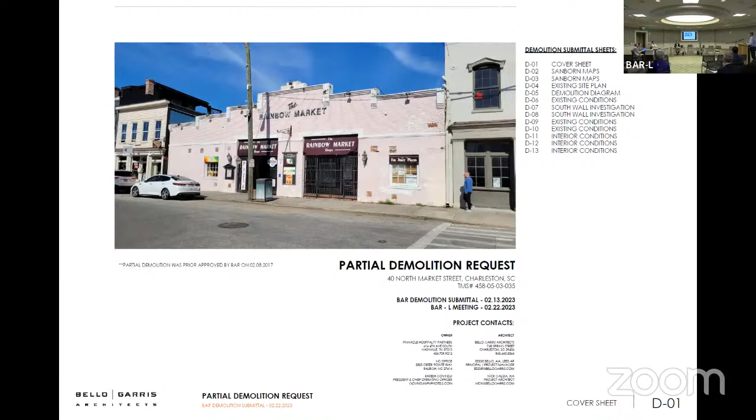This is a little bit unusual in that back in 2017, this project got approval for partial demolition, keeping the south facade and part of the north, sort of an old remnant of a wall. We're asking to keep the south facade again and tear down what's behind it. That paneled wall, in our opinion, is not contributory. So what I'm saying is a lot of this has already been approved, but the demolition approval has expired and we're reapplying for that. Next slide, please.

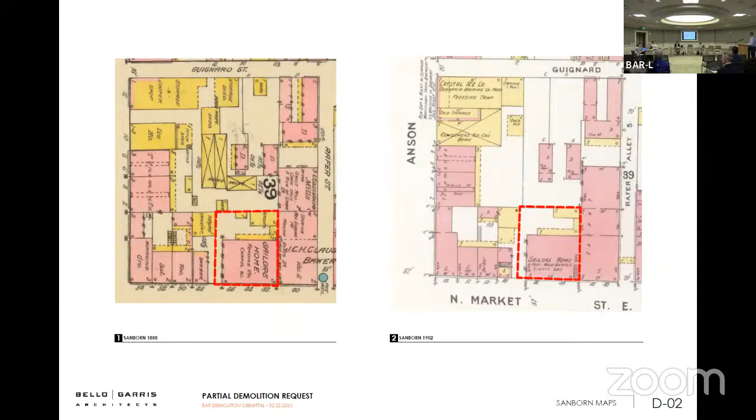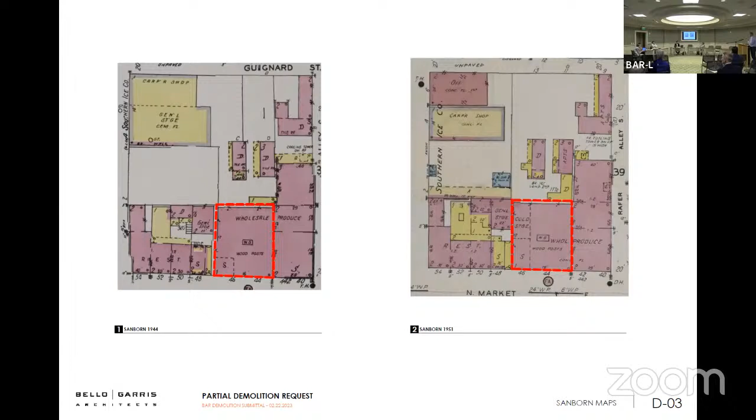So there was a historic sailor's home, tenement house, boarding house that has long since gone on the site in the early 1800s. Next slide. Both of these show the warehouse wholesale building that we're requesting demolition of. Next slide. So you can see here what's in red. This is an existing building. We're not doing anything to that. We're keeping this, removing what's back behind it.

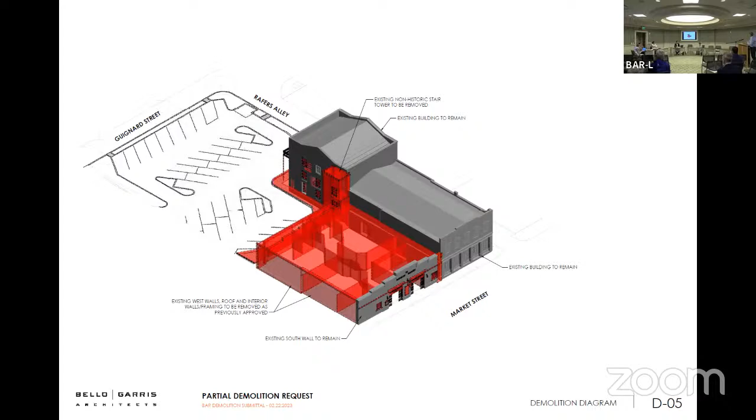Graphics showing there. So we had a site visit yesterday. Nobody showed up except for me and Lawrence and Nick and Aaron. We can show you some photographs. Next slide. Not a lot of historic fabric. This facade has been altered over the years. In the prior application back in 2016, another architect did some exploratory work to see what was behind that facade. It's been altered a lot. I don't think there are the original openings. It's made of block, some historic brick, some new brick.

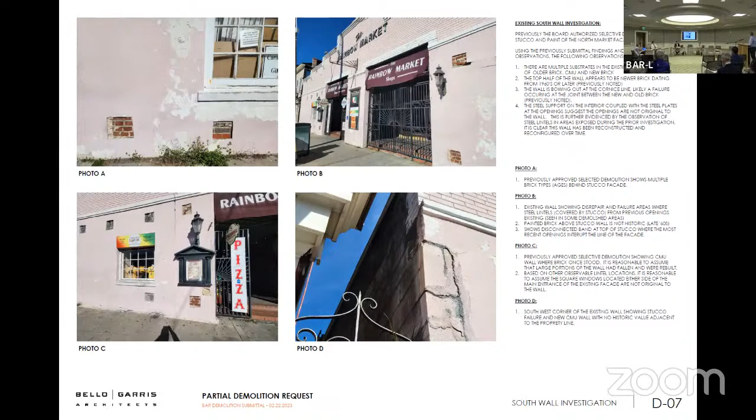Part of the building, you can see in that bottom right photo, is concrete block, the whole western wall. Again, we're keeping that south facade, and we have another project coming to talk about that, but even the part we're keeping is not particularly historic. The form is, but the actual fabric is not very significant. Next slide. Just showing, if you haven't been out there, I think a lot of people have walked through there around the market.

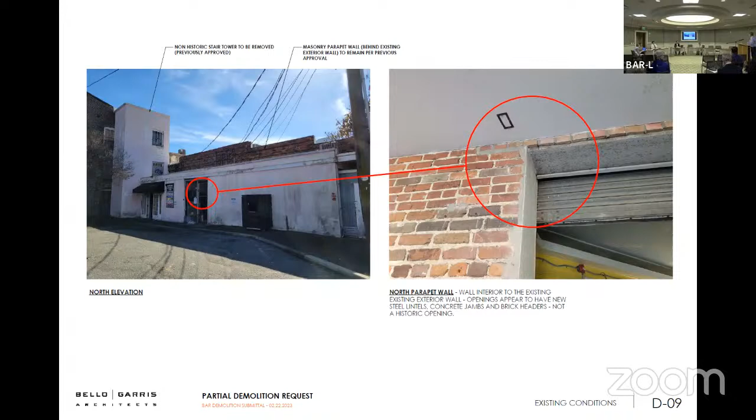This wall was asked to be kept because the architect was going to have a courtyard and this was going to be exposed. If you go to the side, much of this wall's already gone. There's a big opening here and another one here. So there's really just a little wall left. So we're asking for all that to go. Obviously, all this back here is not historic and doesn't contribute. There are not. Next, got one or two. So what's already been approved, other than that little back wall, and I'll just take questions.

Thank you, Mr. Bello. I'm going to borrow a cue from Mr. Metters, who's not with us here this evening. Is there any member of the public who wishes to speak against the partial demolition, I should say? Any member of the public wishing to speak against? Okay, thanks. City staff comments or recommendations?

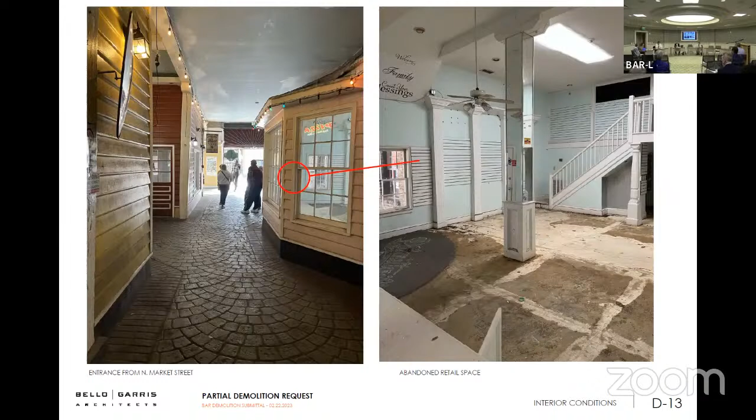So 2 comments. Number 1, exploratory demo indicates that the south-facing wall is constructed of differing materials of varying ages. Additionally, the presence of steel plates and lintels indicates that the existing openings may not be original to this building. And 2, similarly, the openings on the north wall do not appear to be historic based on the presence of steel lintels and concrete jambs. The masonry parapet wall, which may be the most interesting element of the facade, sits behind and is mostly hidden by an exterior wall added later. The stair tower is not original.

We're recommending final approval for partial demolition of the structure at 44 to 46 North Market Street, retaining the south facade. I don't think there'll be any time. No. We'll move to board discussion on this agenda item, if any, or if not, a motion.

Motion to approve final approval of partial demolition. There's a motion for final approval of the partial demolition pertaining to the south facade. Is there a second? Second from Ms. Sobchak. Ms. Sobchak, how do you vote? Yeah. Ms. Brown? Yeah. And myself, in favor. Thank you, Mr. Bello. Thank you.

That's good because I have half my class here. Oh, you know, it's really embarrassing. You should have told us that. You should have told us that. Y'all need to stick around for something good. Good stuff's coming now. All right, thank you. All right, very good. See y'all.

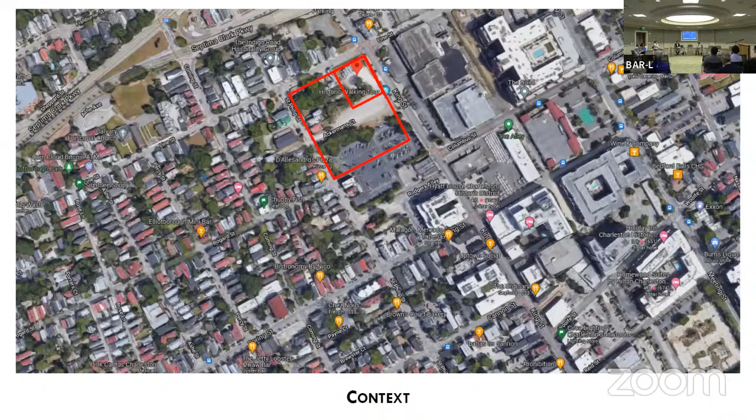Moving right along, agenda item number 3, 649 King Street. This one is Courier Square Phase 2, Building 2. It's in the Cannonborough and Elliottboro neighborhood, at Districts 4 and 6, and in the Old and Historic District. The request for preliminary approval for a 15-unit apartment building with ground floor retail. This is Courier Square 2, and the smaller outline is where Building 2 will be. What it looks like today.

All right, we're ready for the applicant. And for anyone who wasn't here earlier, that microphone is not really working this evening. These are. So if you just speak and enunciate clearly and everyone out there can hear you, you'll be fine.

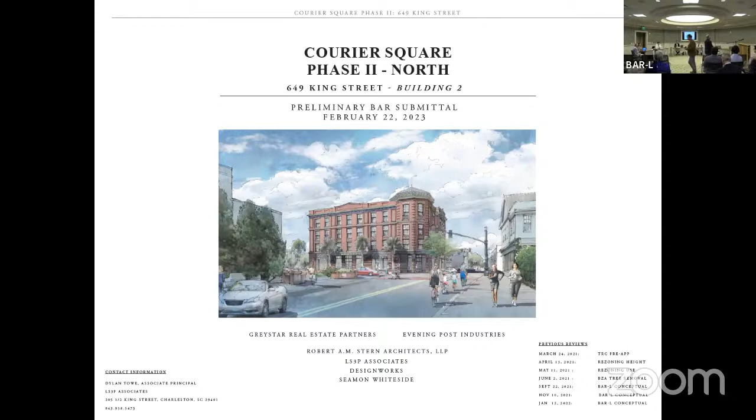I'll be very brief. Ben Lee's out with Greystar. We've gotten to know each other. We've been at this project for quite some time. Tonight's really about further iteration of the building, refinement a whole lot. We think a whole next level of detail since the last presentation. So we're excited. Thanks for your patience as we take our time to really get this building and the rest of this community right. So I think Scott's going to say a few things. Turn it over to Gary. Or Gary first. Yeah, either one. I think you're right. So, Lawrence, go forward a slide, if you don't mind.

Yeah, right there. So, what we're doing from a site development and landscape point of view for this project, we're going to come to you one time for all of that work, when building 1, the large building, comes to you. So we certainly are here to answer any questions about what's happening with the site if you want, but it's really not a part of this application. It'll be submitted for one approval. So now it's you. Gary? That's all I have. Gary Brewer.

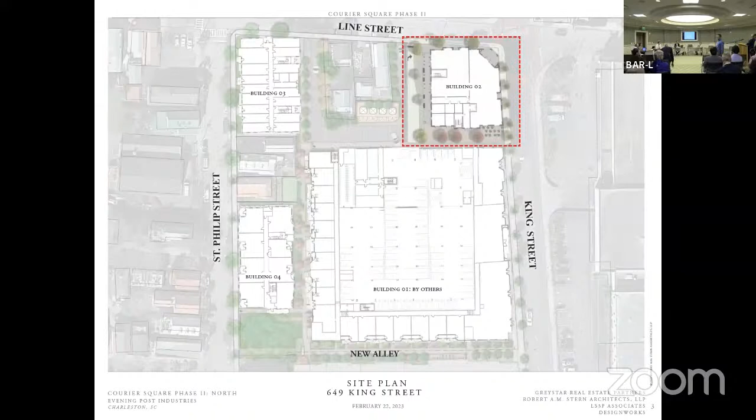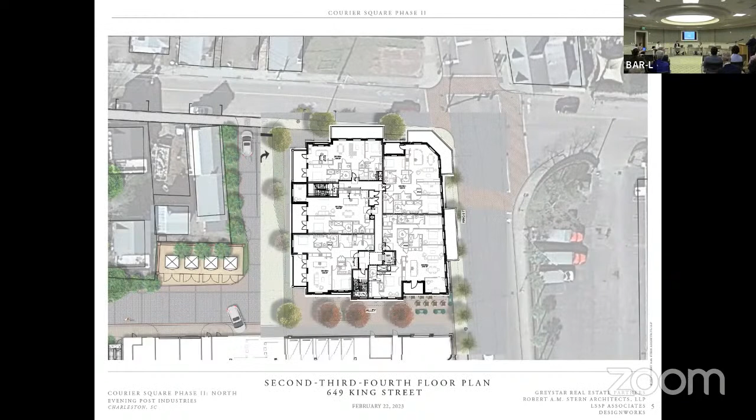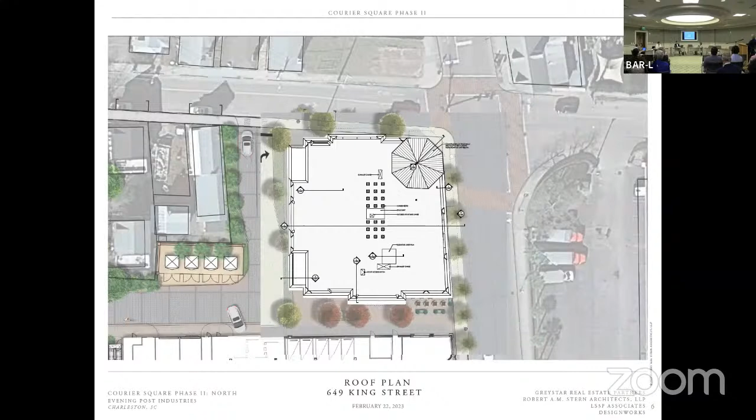So the site, as you know, is on the corner of Line and King Street with a proposed alley to the south and a motor court to the west and a corner entry on the corner. And there are 5 units per floor. This is the roof of the tower and the mechanical set in the center with high parapets to conceal it from the pedestrian view. Next, please. So the BAR comments were sort of minimal. Basically studied the cornice and the tower further. Next, please.

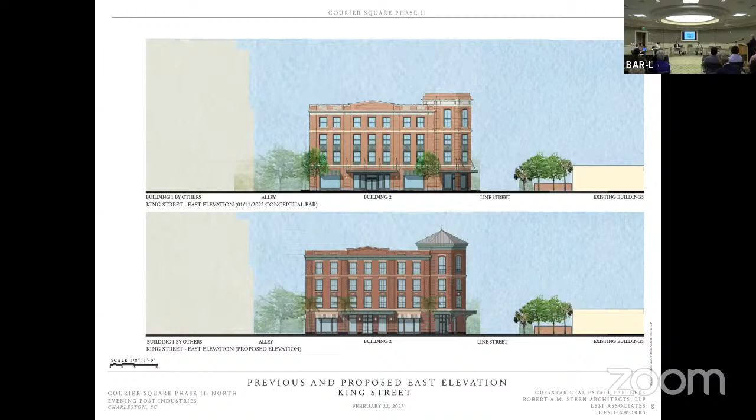And these are the before and the proposed elevations facing King Street. So it is largely the same with a few development of details, but the biggest change is we are proposing to cap out the top of the tower with a sloped metal roof. And in an earlier scheme, and we had studied it a number of different ways, we had metal as part of the design, and the feeling was that the sloped roof look slightly taller and terminate the view on Line Street looking west from Meeting Street and on King Street looking south. Next, please.

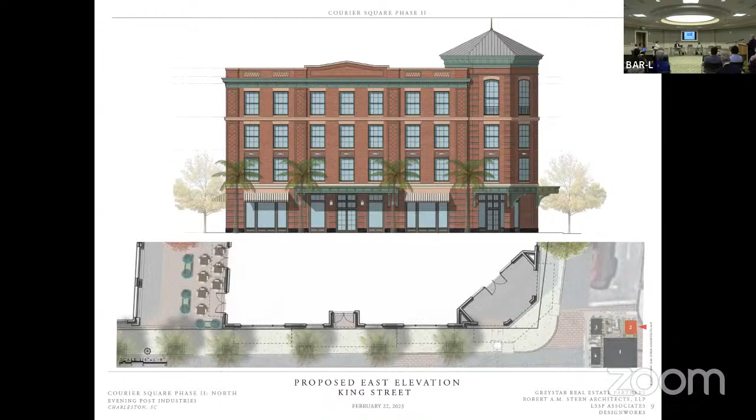So here is the King Street elevation. I'll describe the materials later on, but we're basically proposing 3 colors of brick, a kind of darker brick, a brownish red brick, and then a red brick. We're using those 3 colors to pick out special brick details. There's a canopy, FRP canopy facing King Street, and that wraps around the tower. Next, please.

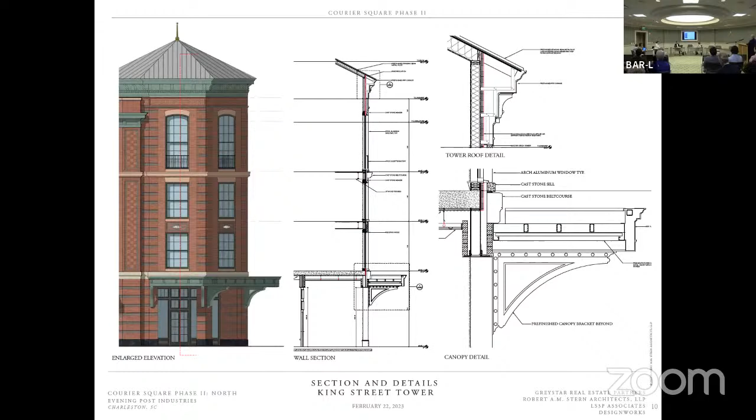And here are the close-up elevations and sections through the tower. The cornice is proposed to be FRP with a bracketed cornice at the bottom of it, and then here you can see the canopy that wraps the metal roof would be a standing seam, true standing seam roof. Next, please. And then this is a corner of the building showing the canopy and the same cornice, which we rendered in a sort of gray-green with brackets that will wrap around all sides of the building. And then the canopy would also be the same matching gray-green.

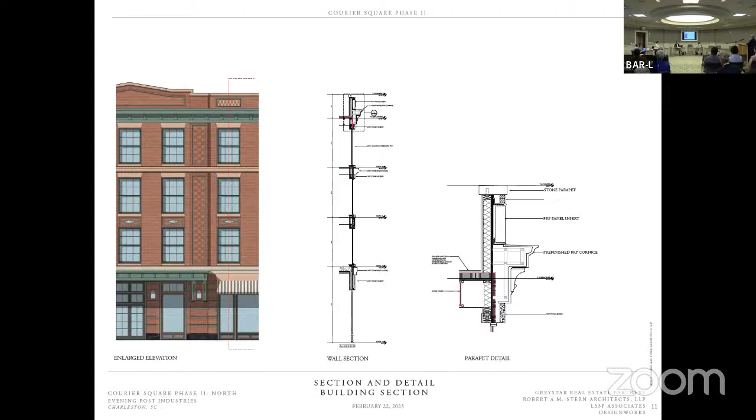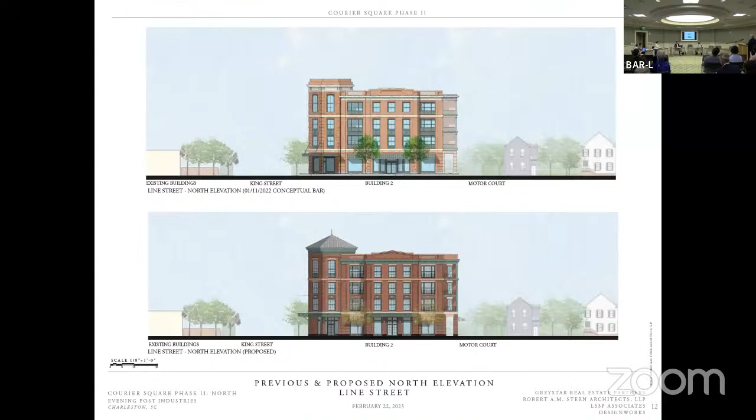The window, jack arches, and sills we would pick out in a precast in a sort of reddish gray color along with the canopy. So this is the elevation at Line Street, the earlier, and the proposed on the bottom. Next. And then again, just carrying on the details that are developed on King Street all the way around the building. This side will also have retail and a canopy on Line Street.

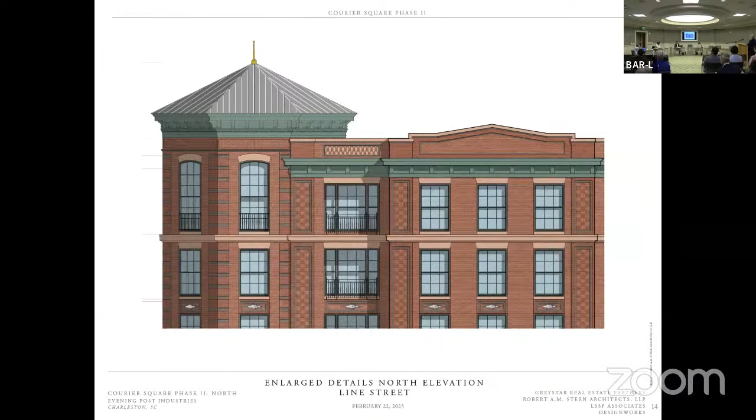At the parapet, we're proposing a decorative panel, very similar to what you see on many of the historic buildings on King Street that have metal panels with acroteria. And so we thought that would be something nice to add to the building. And then at the spandrel panels, we're doing 3 colors of brick, and at the center proposing to use a white and gray and black marble as an inset. The windows are proposed as a black and a gray with the brick and marble.

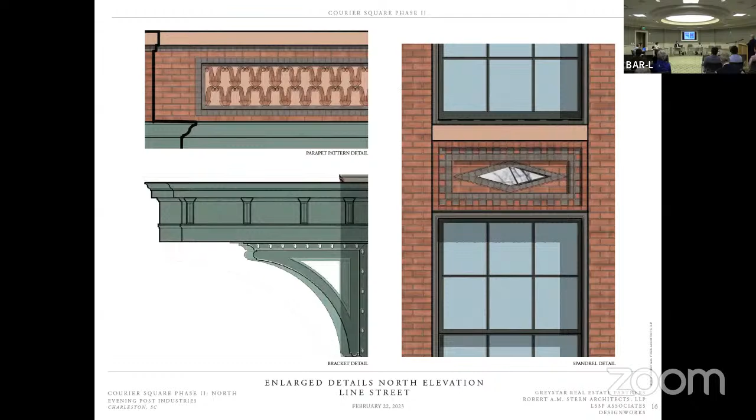Next, please. So some of the details, we are also proposing metal rails at the balconies. And the base of the building we're proposing to do in granite or black marble, which we think works with the color scheme of the building.

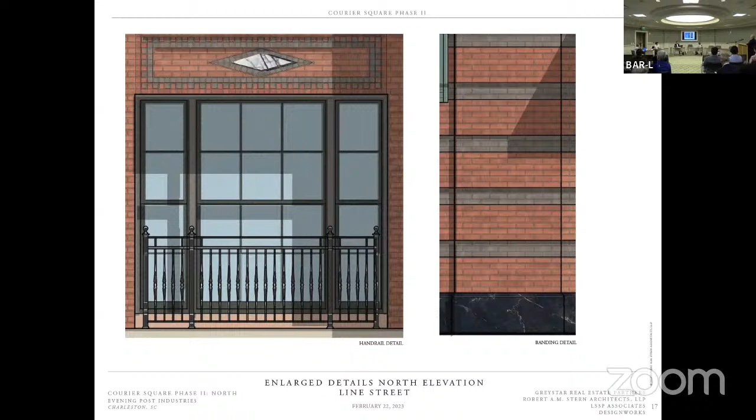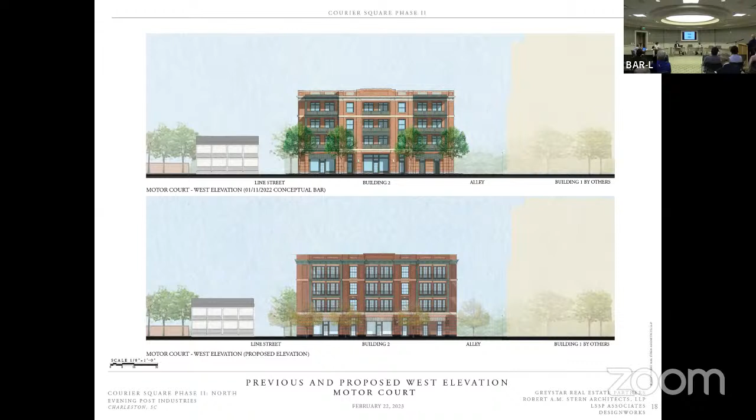And then moving around towards the motor court, the west, this is the side that has most of the balconies. And so you can see in the middle, there is an inset balcony for the top 3 floors that is bracketed by brick elements on the right and the left, and then additive metal. And you can see that there is a pedestrian walk underneath the building, since it faces west, and there might be outdoor dining there next to it.

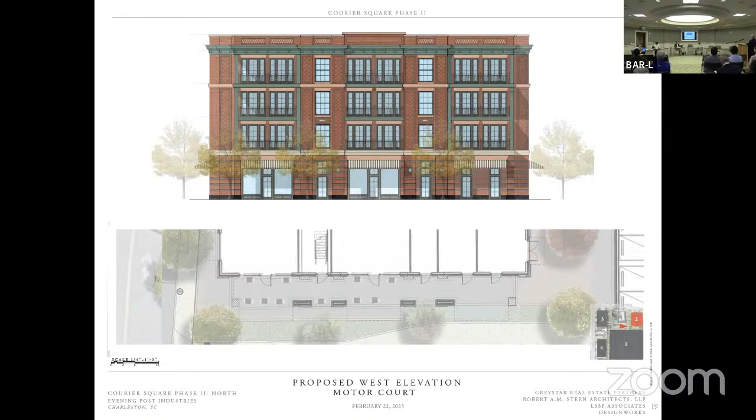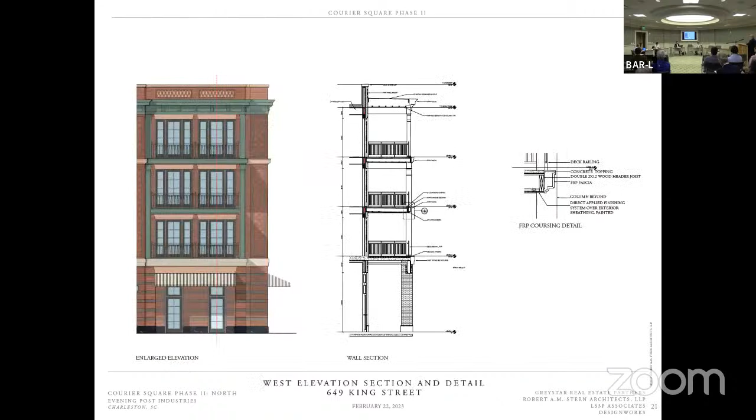And then these are some of the larger scale details of the pilasters and the metal balconies that will have metal round columns that will match the color at the top of the building. And then sections through the balconies.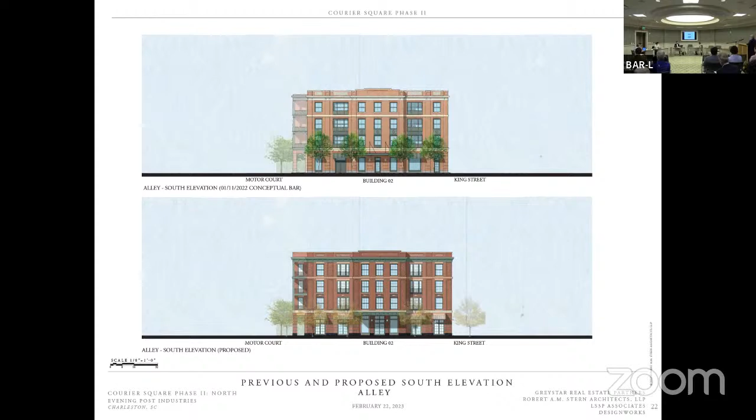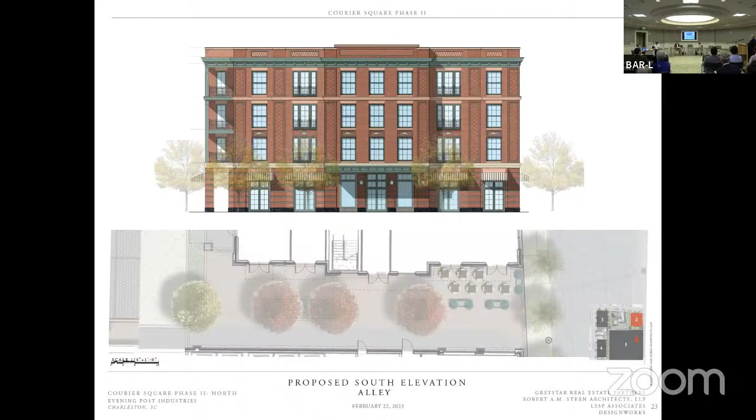And then finally, moving towards the alley, which is the south elevation that faces towards building number 1. So it is much the same as the other 3 sides, carrying around all of the similar details that we have on the other sides. There is a canopy and awnings at pedestrian level that faces south with one of the main entries off of the alley, and the parking. Next, please. Four elevations together. Next, please. Sections.

And then the material palette. So FRP insets and panels with 2 colors of gray for the windows and the mullions. The painted metal balconies would be black. The parapet caps would be cast stone to match the color of the brick. We're proposing black and taupe and gray awnings, and then a belt course that's a lighter cast stone color, and then the marble samples, and on the bottom right you can see the 3 colors of brick with the black accent and the black water table, which is granite.

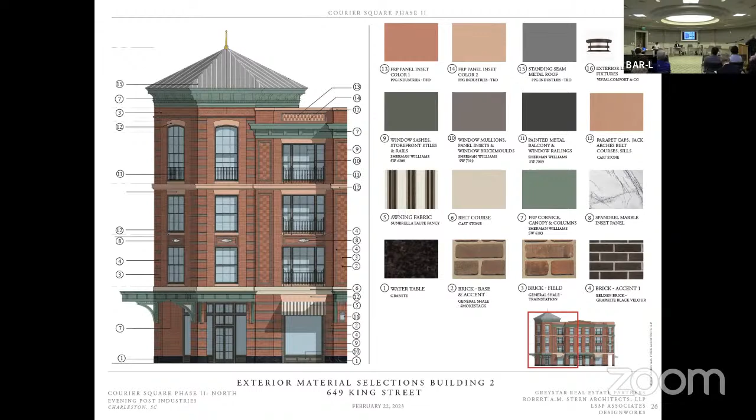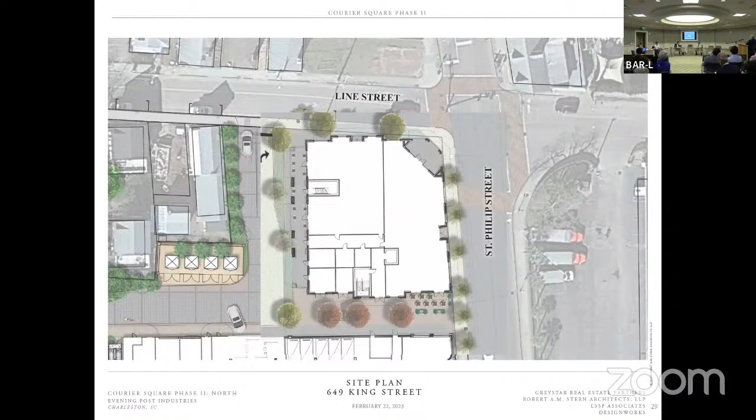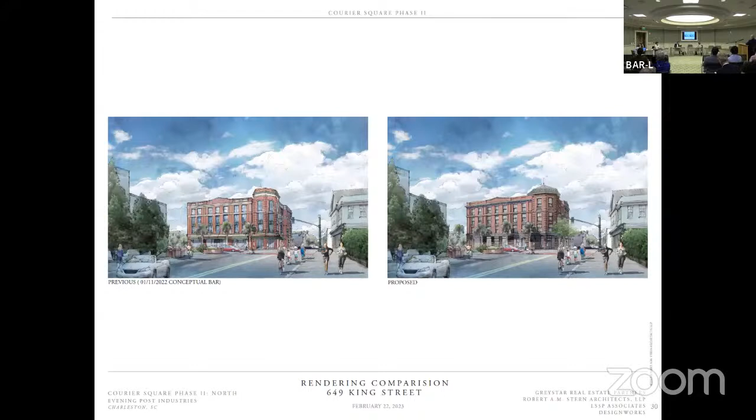So this is the before and after perspective, which basically shows the character of the building not changing with the exception of the sloped roof. Next, please. Which we think is an important urban gesture because you will see it from Line and King. The idea of the sloped roof was to give it just a little bit of extra height.

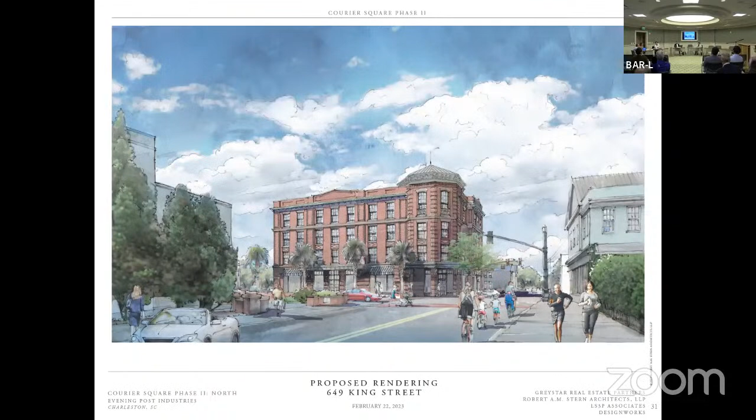Is there any member of the public who wishes to be heard on this agenda item? Hearing none, city staff comments or recommendations? Refinements include the reinstatement of a roof to the tower element, which gives this element a more finished appearance, a revised window grid, which seems more appropriate for the architectural language, and better proportions to the storefront windows. While ornate in design, the hard awnings feel very heavy, more notably where one wraps the corner tower element, and should be restudied.

Three, the board has shown a cautious stance on GFRP for durability, with a decided preference for GFRC. FRP cornices and other parts noted should be replaced with GFRC. GFRP should be limited to the vertical panel inserts noted on pages 26 to 28. And last, round column bases and capitals as shown on page 21 are oddly minimalistic and flat in appearance with a double astragal form. Staff recommends a more traditional treatment of these columns. And we are recommending preliminary approval with board and staff comments.

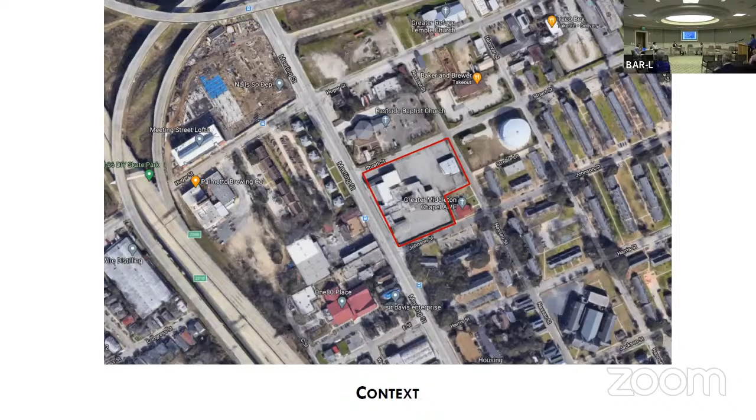Thanks, George. My name is Ross Kirby. I'm with Dynamic Design, the architect for the project. And before I get too far into the presentation, I'd like to request an extra 5-10 minutes. It's a fairly sizable project. We made some substantial changes to the scope, so we want to make sure we're able to cover all that in depth. That's all right. Sure. We'll give you an additional 5 minutes to go through that. Okay, thank you.

As far as zoning, this project is zoned for 5 stories for the first 120 feet of depth along Meeting Street and 3.5 stories along the rest of the site. We first presented this back in July of 2021, and at the time we were seeking an additional 6th story along the front and a full 4 stories on the back, and pursuing architectural merit for that. And in those previous iterations, most of the feedback we got was that the massing was too much, and was not respectful of the existing building in the way that was appropriate.

And so what we did was we took a step back and partnered with LS3P and DesignWorks, and Brianna Deering and Christoph Germain are here with me to walk through the presentation. And without going too far into the design, the main thing we wanted to do was take the scope of the project and reduce it to a point where it can be designed within the envelope that's allowed by the zoning.

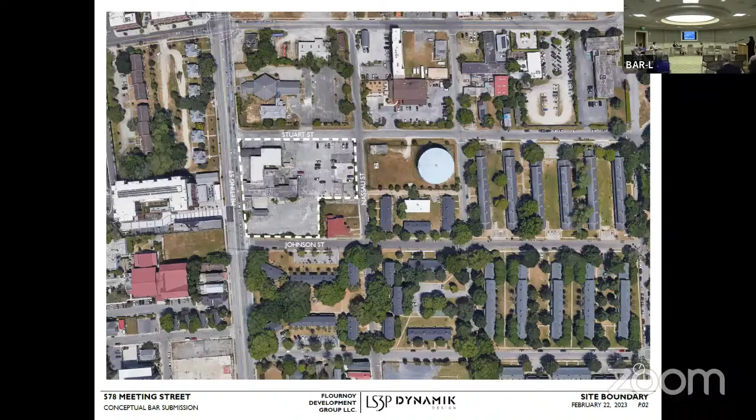So just a brief refresher: to the north, we have Stuart Street, to the west, we have Meeting Street, to the south, we have Johnson, and to the east, we have Nassau. As was mentioned, we've already received demo approval for this site, so that photo you see in the middle to the right is what is being saved, the historic remnant, or what will be referred to as the Regis. In the bottom right-hand corner, you can see the extent in plan of what that building looks like. So a front facade, 2 side walls, and a little turn-back wing to the back. And that current facade has existing filled-in brick recesses. Next.

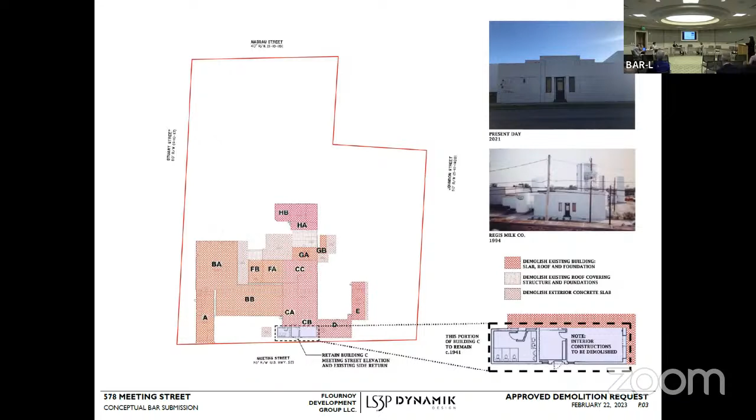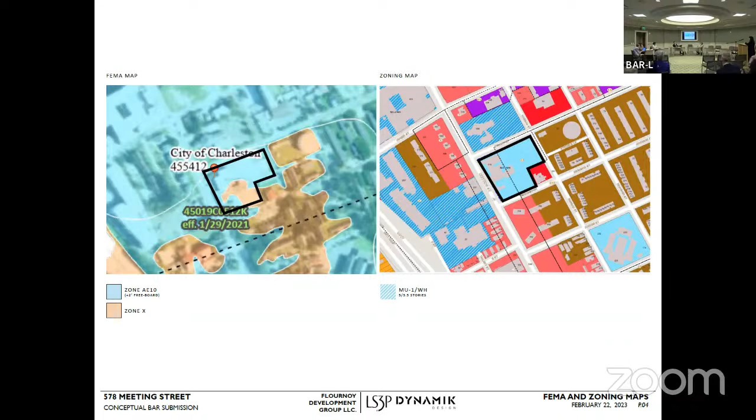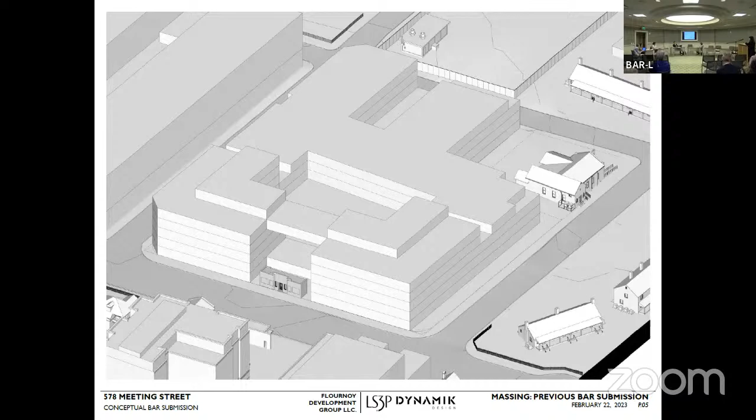For this slide, things to note are that we're majority in zone AE10, and with a 2-foot freeboard, that would put any residential units at elevation 12. Next. So as Ross mentioned, feedback that we heard from the board in our last presentation, which was a denial, was that overall the massing was too much and that there wasn't enough breathing room or respect to the Regis. So next. We buried the parking, which was the biggest factor in that large massing last time. Next. And ultimately we're left with essentially a blank slate.

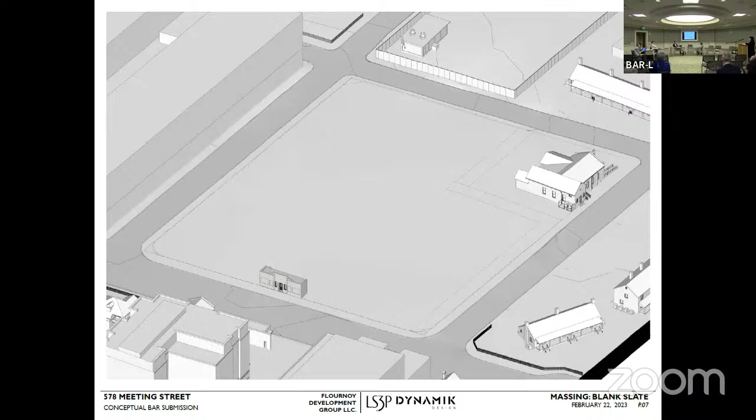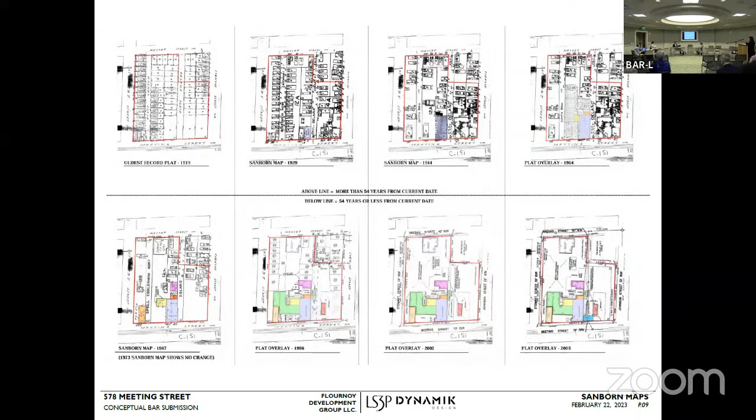From there, we wanted to consider what the organizing factor should be on the site for a potential multi-building scheme. Next. So our zoning envelope is 5 stories along Meeting, 3.5 stories towards the back of the site with a 120-foot setback. Next. So we took a look at the historic aspects of the site. We looked at the Sanborn maps and found that for the majority of the site's documented lifetime, there were 2 alleys running from Meeting Street to Nassau Street, Boland and Smith alleys. Next. And that historic Regis remnant was lined up exactly with one of those previous alleys. So we thought this would be a great factor to bring back into the site as an organizing element.

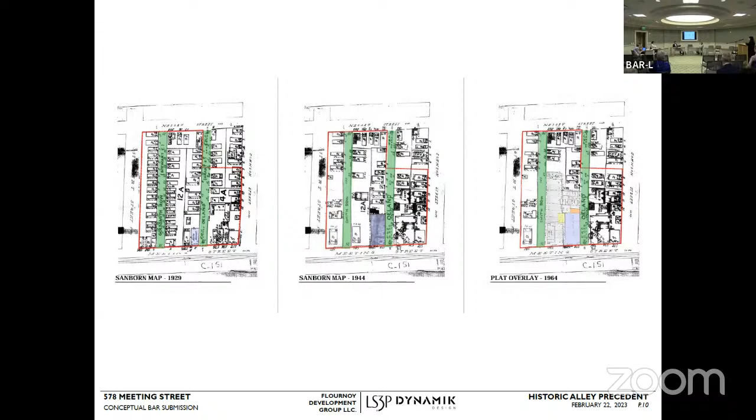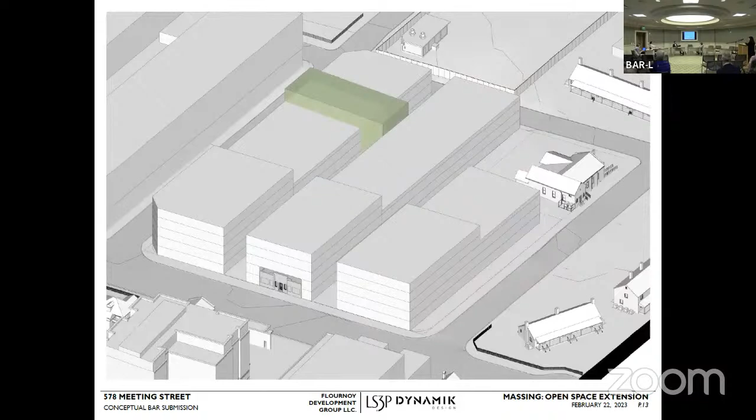Next. So you can see that zoning envelope with those potential alleys cutting through. Next. With those subtracted, we still felt that the Stuart Street mass warranted a little more breakdown in its length. So next, we extended one of the alleys to Stuart Street. Next. We still wanted Nassau Street to have more of an urban edge. So next, we brought that building to connect it. However, we still wanted that north alley to read along Nassau Street. So we are showing a hyphen in that Nassau building, and we are also lifting the ground floor up, providing a breezeway that gives a peek into the alleyway. Next.

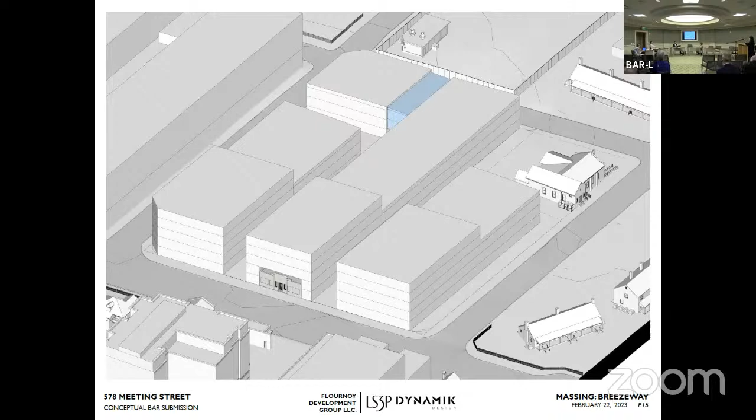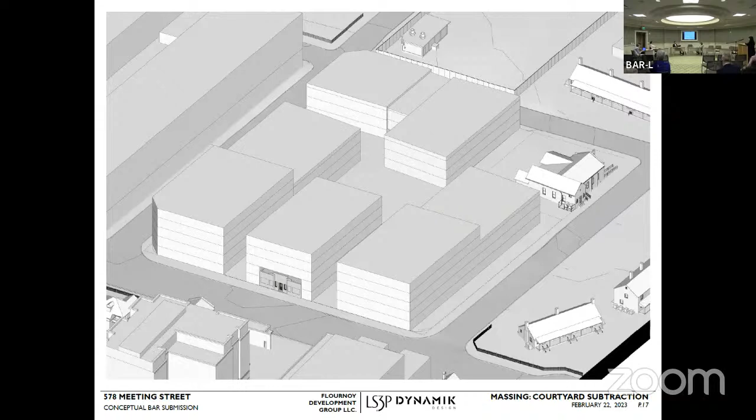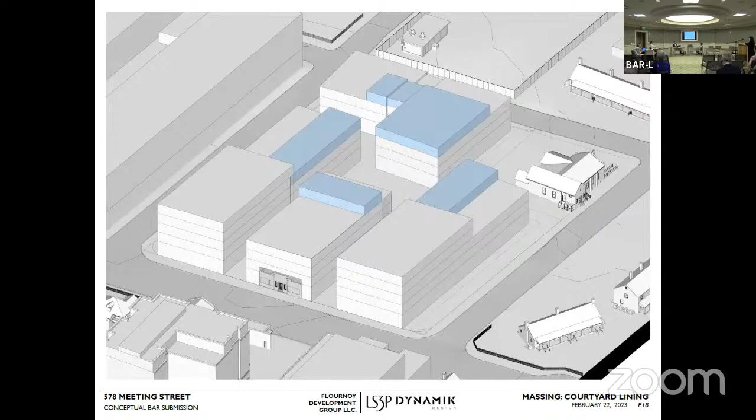We felt that there should still be a central hub for circulation throughout the site for residents, so we're providing a courtyard in the center. Next. From there, we still needed to deal with the fifth-story section on the back of the site. We felt that it was most appropriate to line the courtyard with that fifth story. Next. What this did is it allowed the massing along the street edges to be minimized and more appropriately scaled. Next. We also wanted to respond to the Regis. That's a very important aspect of this project.

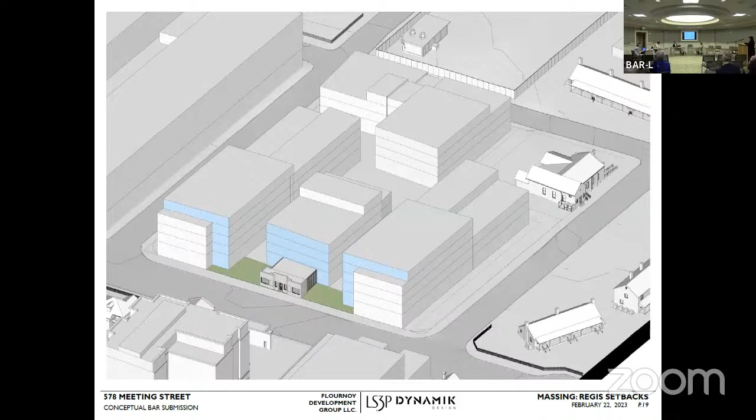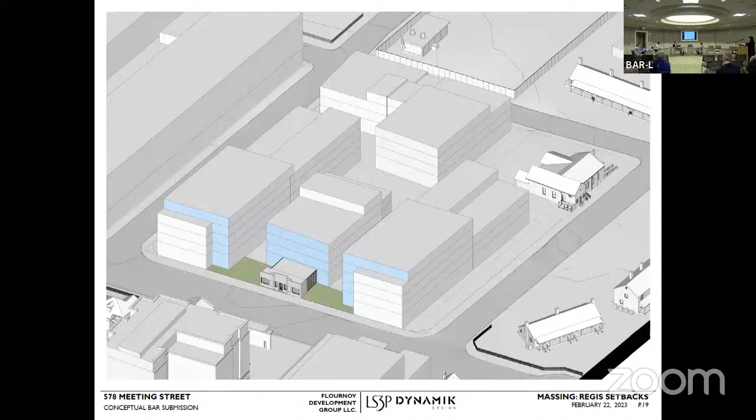So for that middle building, we set that facade back 25 feet. We provided a connector. Also, in the middle building, instead of building up to the full 5 stories, we set that 5th story back 80 feet from the property line to make it very minimal or almost non-existent from the street's edge. We also wanted the north and south buildings to genuflect to the Regis in the middle, so we provided a setback to also give more vertical proportions to those front massings. And what all of this did was really make the Regis feel like a remnant in a park-like setting. Next.

As far as our facade organization, we focused on a concept of formal facades versus informal facades. So to us, that essentially meant the city-facing aspects of the project wanted to lean more into traditional a little bit. So, brick punches with some brick relief. And then for the informal facade, which is what you're seeing highlighted in blue, more frame-like elements, a little bit glassier aspects on the facade. Next.

What's interesting also, like we mentioned, all the units are at elevation 12. And so what we did is we raised the alleyways, which are on top of the garage, to elevation 10. So what it does, it provides smaller stoops and smaller staircases, because all the units on the ground floor, except for 2 units, are accessible from the outside and not just from the corridor. So it creates life on the streets as well as on the alleyways, with people coming in and out. The alley is at elevation 10, the units are at elevation 12.

And also throughout the site, all the streets can be very different. Stuart is at elevation 7, so we have a much higher stoop, about 9 steps, 4 feet of distance. While on Johnson, we only have a foot; the sidewalk is at elevation 10, so we have basically 2 steps only to reach the units. Nassau will be more dedicated to service, much tighter right-of-way. And this is where you're going to have the dumpster, the trash, the delivery, and the entrance to the garage. So you don't even realize there's a garage on the site.

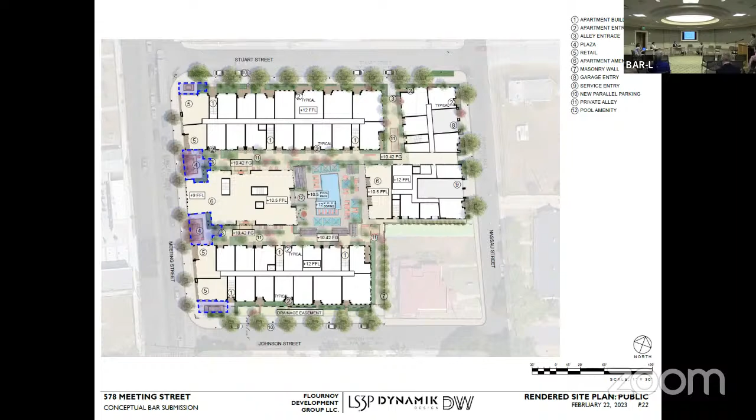Ultimately, the architecture wanted to celebrate and emphasize the Regis historic remnant. So the design seeks to read of its own time while also referencing that remnant and its previous life as an industrial site. Next. We wanted that middle building to feel like a backdrop to the Regis. You can see here that the Regis has lots of breathing room on both sides with those public courtyards. We also wanted to breathe new life into the Regis itself.

So you can see that those recessed brick panels that exist today are intended to be replaced with windows, providing light through that facade. The biggest element of that historic remnant is that stepped parapet, so we wanted to emphasize that as much as possible, and we did that in two ways. The building behind the Regis is more glazed than some of the other buildings on the site, so it's silhouetting that facade. Further, we are suggesting to paint those layers of the Regis in a gradient to further emphasize some verticality on the building and that feature of the stepping. Next.

Also, just quickly want to mention that the Regis is planned to be the front door for the project. On this sketch, you can see very clearly the two plazas flanking either side of the Regis. Also some outdoor space for those working units, for either tables if there's a coffee shop in the space, or maybe some of the businesses spilling outside.

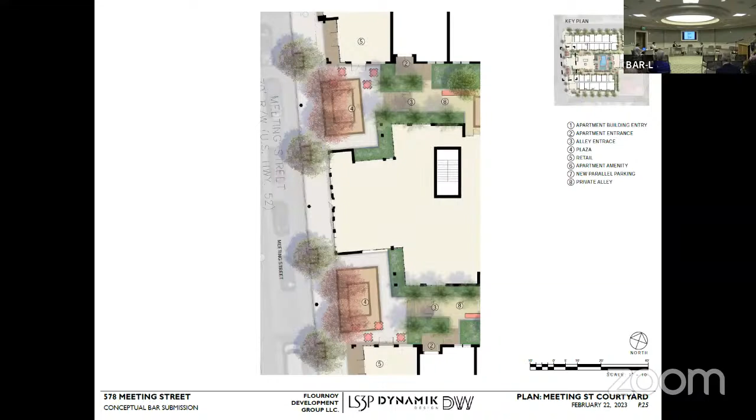For the section through those courtyards, the connection from the Regis to that middle building in the back, we wanted to provide a glassy connection to make sure that it read in contrast to the Regis. We're also, like I said, setting back that middle building 25 feet from the Regis facade, and then we'll also have a gate element between those public courtyards and the private alleys.

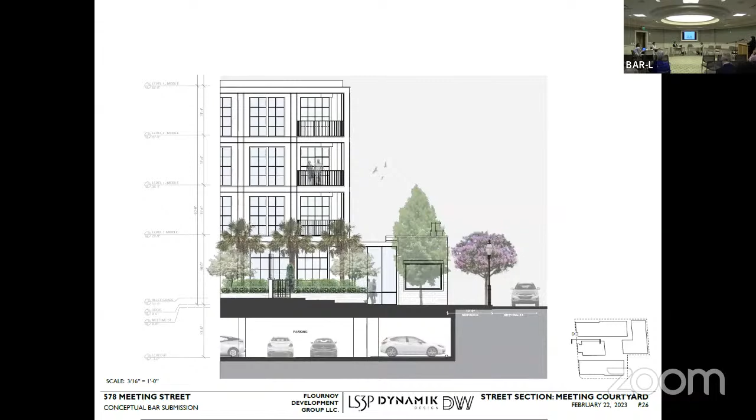Next. You can see on this illustration the special paving we're going to put inside. You see that it's having one type of material. This is just a place for finishing, and we have trees also to kind of bring that garden of the alleys out to the streets. You can see those few steps coming up, the planter.

And we used a lot of precedent that we saw around Charleston: the walls, columns, ironwork, landscaping. All that stuff basically is reminiscent of the tradition of Charleston gardens in a perhaps much more modern or contemporary way of doing it, but it still reminds you of what the big green in Charleston is about. Next.

When we were considering these alleys, we really wanted to look at precedents of alleys throughout Charleston and what the ideal width would be for the scale of these buildings. One benefit of pushing the buildings back from Stewart and Johnson streets is that we can make that ideal alley width, because previously it could have been up to 30 or 40 feet wide. So we wanted to really provide the ideal alley width, which in our study we determined was 25 feet. These alleys are going to be lushly planted, and they are going to provide light and air throughout this complex.

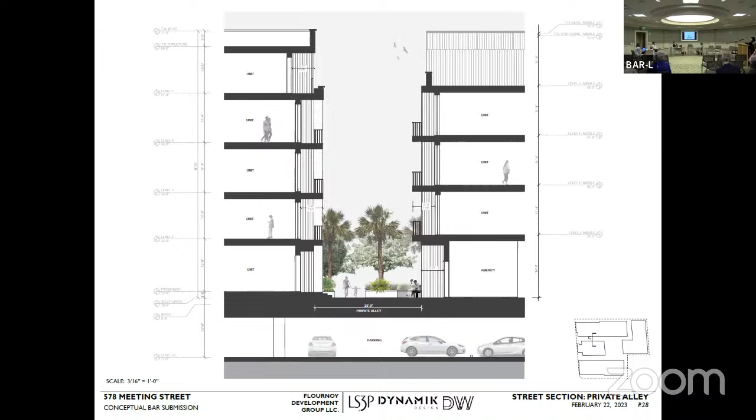And this is an illustration of what may happen in those alleys. And again, we talk about those raised planters. Technically, because of being on top of the garage, they need to be raised, but at the same time, it softens the facade and creates a much more pleasant environment at pedestrian level. As you can see, they move throughout the site. They start and stop, and where there are no planters, you can have a gathering space.

And again, I think the narrow alley, with the heat we're having right now, is going to be shaded space with cooling air. You can see downtown when you go down an alleyway, it's always much cooler than the large streets. So the idea of those narrower alleys will actually be much more pleasant in the summertime than having a wide open space. Next.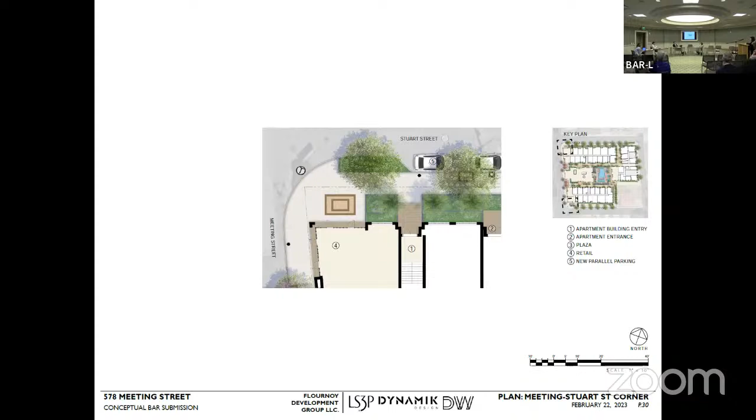Ultimately, as we transition from the Meeting Street facade to the Stuart Street facade, you can see that contrast in the formal facade of the brick and the informal facade of the alleys. So at that 5th floor, we felt it was important to set it back so that it really felt more like 4 stories along the street edge. And that also allowed us to bring that formal facade concept down to the ground towards the Regis. And then those vertically proportioned brick masses create a nice rhythm as you walk down Stuart.

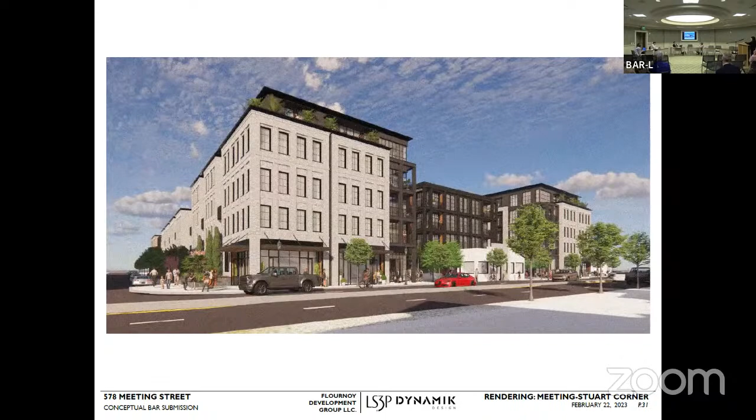As you transition from that 5-story to that 3.5-story, you can see here that we still kept those vertically proportioned masses. We felt it was important to use the balconies as organizing elements and as relief on the facades to create a townhouse-like feel. And that also created a fine opportunity to bring in stoops for those residential units. Okay.

You can see here that we have set back the facade, I believe it's 15 feet from Stuart Street. And again, like Christoph mentioned, Stuart has the most grade change at about 4 foot of stoop. Next.

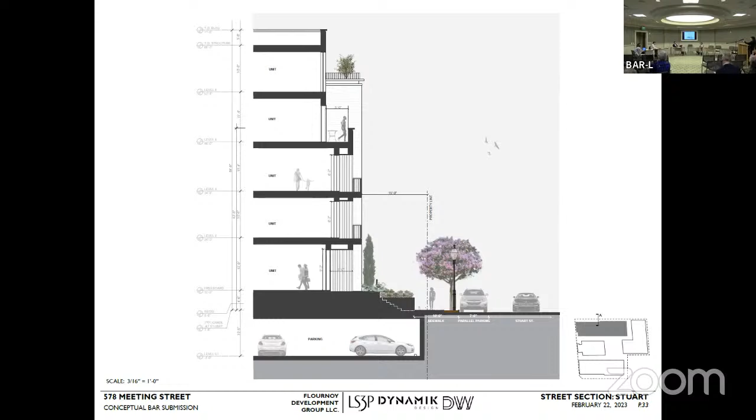That's the illustration of the way we want to treat the streetscapes. Since we have a 4-foot drop, those stoops are much taller. So the idea is also to use planters, and this is the first try on maybe creating different heights. As you go down, it goes up and down and changes as it goes. It won't be so linear all the way through, so it goes one block and changes further on.

You can see the parallel parking added, the 10-foot sidewalk, and the turn of the stoop, which really lines up the hyphen. By doing those planters, we can also create some trees and landscapes within those planters that also help decorate the facade and add on to the history of the facade, with the beautiful street trees and lights on the street. Next.

As we travel further down Stuart Street, this is where you start to see that concept of bringing that alley outward towards Stuart to break up the masses. You can see that we're bringing that concept of that framing out towards the street to again provide some variety along Stuart. Next.

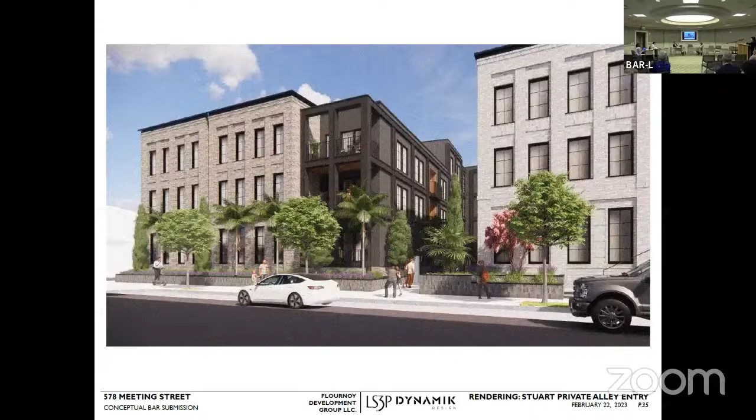As Christoph mentioned when discussing the site plan, the Nassau facade is really a hard-working facade for the site. It's housing the loading, trash, as well as the parking garage entry, but we still wanted it to feel residential. We thought that was important for that neighborhood. And so we provided some ins and outs on the facade to provide relief. We also brought balconies and stoops to this street as well.

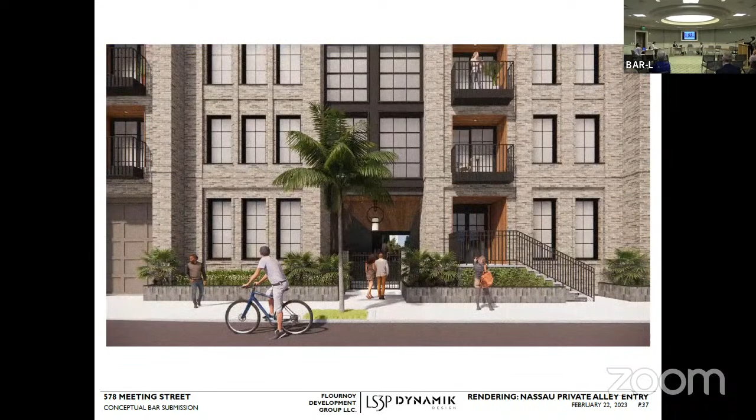Next. As you can see, the streetscape is much tighter here. The facade is closer to the property line, but we're still providing sidewalk, and the stoop is actually a very traditional Charleston type of stoop with sidewalk staircase that you can see all over Charleston. And we still wanted to provide some landscaping. So we still have low raised planters in this scenario with lower landscapes.

And you can see in the center, this is the hyphen that's actually in line with the alleys that go all the way to Meeting Street. So it's also a gathering space. And then you can see the gate on the right, and this is going to be used as one of the gate entrances to the complex, with the idea of uniform language on the lighting and the entrances that match the rest of the building across each one of those entrances.

We don't want Stuart to feel monotonous, so we are studying the idea of providing a separate brick color or potentially brick detailing down the line on the Nassau building, just so that we have more of that variety along that facade. Next.

We also considered the importance of the church along Johnson Street. So we have a 15-foot drainage easement along Johnson, but we also set the building back an additional 10 feet so that if you're looking from Meeting Street, you still see that the church has a major presence along Johnson Street. Another effect of putting that half story along the courtyard is that the mass along the street continues to step down towards the scale of the church.

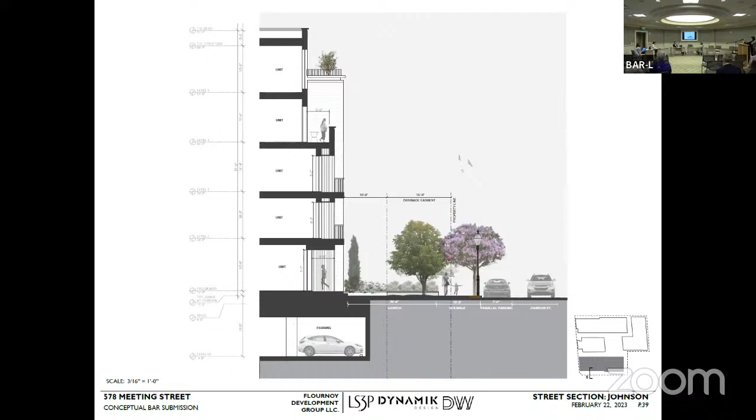You can see here what I meant by the 15-foot drainage easement along with that 10-foot additional setback, and then the difference in elevation along Johnson being between 1 and 2 feet, with smaller stoops. Next.

It's a very different streetscape, as Brandon just mentioned. We are 25 feet away from the street, so you have a much wider sidewalk. And the beauty of it is the grass area is not on top of the garage, so we can plant trees in it, and we can also use grass along the street that can also give a wider public space on the front.

This is 1 or 2 steps. We only need basically small plants or low planters. So again, a very different streetscape on the other side, so we can vary it all along the building and change it as we go to the other side. Next.

This is the corner basically on Johnson and Meeting. Same idea as the other corner, since we are recessed 25 feet. Actually, because we're further back than the other side, even at the planter for that small public space. So you kind of frame the corner as well and create a special place for those unique ground floor activities.

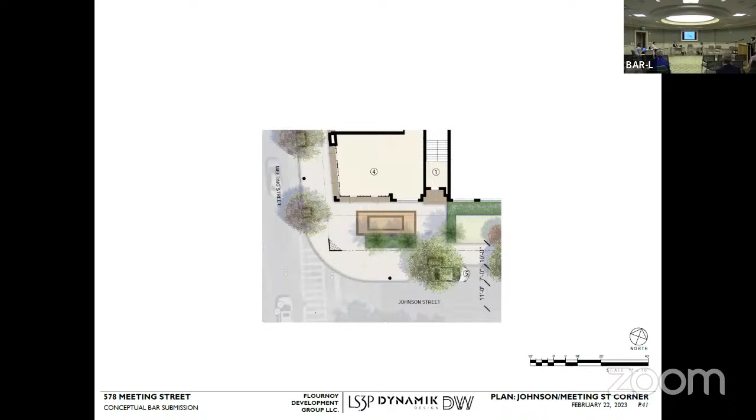Again, separation between the stoops with that small waist planter in the corner, so you kind of block your eyes and lead you actually to step a bit into the units inside. Wider sidewalks at the corner. Next. Similarly to the look and feel of Stuart Street, Johnson Street follows that suit as well with a nice rhythm down the street. Next.

Ultimately, our goal with the project was to create a design that was of its time, of its place, and humanly scaled. And we also wanted to really emphasize the Regis and give it its breathing space. Thank you.

Members of the public wishing to speak on this agenda item. Mr. Schweber. Thank you, Mr. Chairman. We'd like to thank the applicants for meeting with us multiple times well in advance of their submission of this application for conceptual review. We appreciate their willingness to collaborate in order to create a design that successfully incorporates the historic remnant of the

Regis Mill plant. We feel that the assembly of the proposed massing and the architectural direction of the new buildings allows the historic structure to occupy a place of prominence at the entrance to this development and retain its presence along Meeting Street. This design team and the owners have faced two previous denials from this board, and instead of fighting the BAR process, has listened to the constructive recommendations of the board and adopted a totally new approach to their project that respects the character of this part of the city.

Their efforts to incorporate the historic street grid as a means of breaking up the massing and footprint of their buildings is a laudable endeavor, and we feel has been executed successfully. The evolution of the programming along Nassau Street is also a notable improvement over the previous designs. This project is an example to future applicants on how to approach large format developments and how they can utilize the historic fabric of our city to create new creative ways to inspire new buildings that reflect Charleston's unique character.

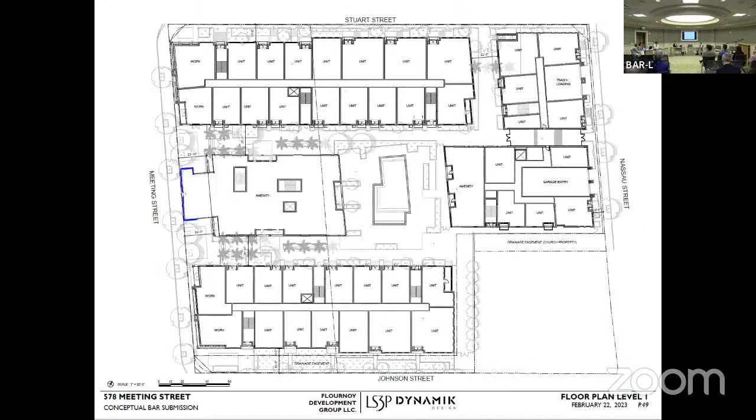So, the current proposal utilizes separate buildings connected by internal alleys that relate to previous thoroughfares seen on the Sanborn maps. This scenario effectively divides the program into multiple buildings, places parking underground, and gives deference to the salvaged Regis Milk structure. Related to the remnant structure, the current proposal gives breathing room to the remnant.

The material palette on the surrounding proposed new facades consists of metal and glass, which complement the masonry and opaqueness of the remnant. The paint proposal for the remnant structure enhances its deco styling. Regarding the proposed new buildings, the use of vertical masses separated by hyphens with balconies makes for good proportions along the streetscape. The private entry, stairways, and planters also enhance and activate the streetscape.

As proposed, there is a focused entry on Meeting and Nassau streets. Placing the parking underground is a huge benefit to the project; this means that no street will have exposed parking garage, and even more important, this means that no building mass is required to conceal the parking garage with wrapped components, which can result in a large volume dictated by parking.

All right, and then staff comments. Number one, restudy the 5th floor as proposed. This portion seems dark and heavy. Perhaps limiting the overhang will begin to minimize the perception. Alternatively, study extending the language of the exterior frame of the 5th floor.

Two, at the 5th floor east elevation, also evident on the rendering from the corner of Johnson and Nassau Street, the brick should conclude in a more meaningful way, preferably continuing and wrapping under the 5th floor. Three, at the east facades of the 4th and 5th floors, revise the horizontal band of windows to be more consistent with other areas. The addition of a grid may help to resolve this concern.